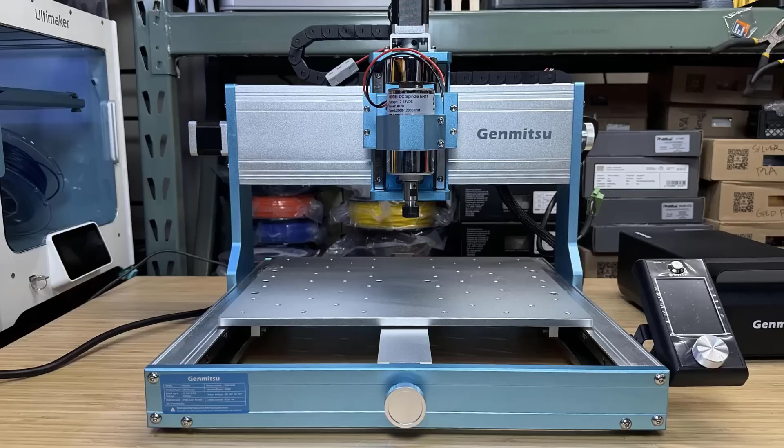As its name suggests, the working area is 300 by 300 millimeters, and the Z travel is 78 millimeters. The motion system uses double linear rails and ball screws on the X, Y, and Z axis.

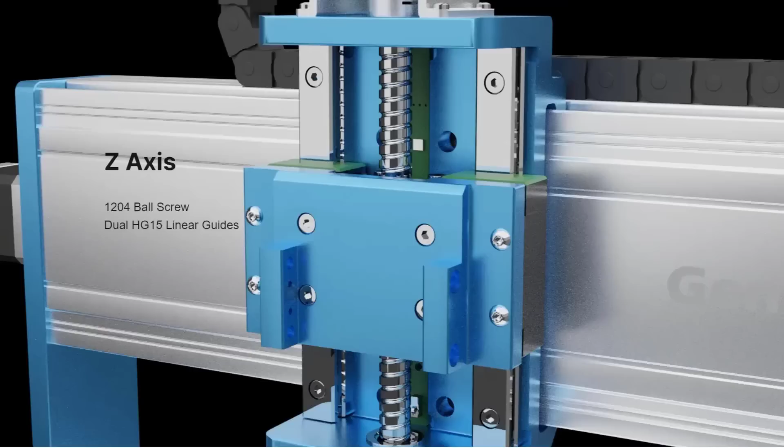The bed is made of one-piece solid aluminum instead of being formed by a few aluminum extrusions or MDF hybrid beds put together by screws. It also has dual limit switches installed at both ends on all axes.

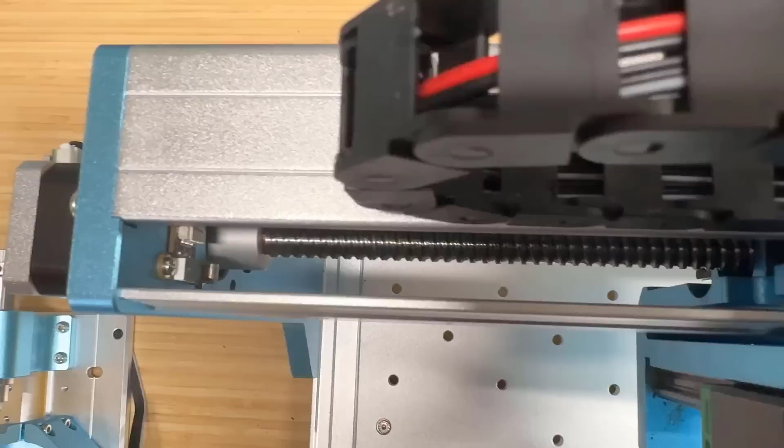The machine weighs over 50 pounds, and for a machine of this size, that's pretty heavy. The stepper motors are 48mm higher torque NEMA 17, and the controller box has its own metal housing and is right next to the machine.

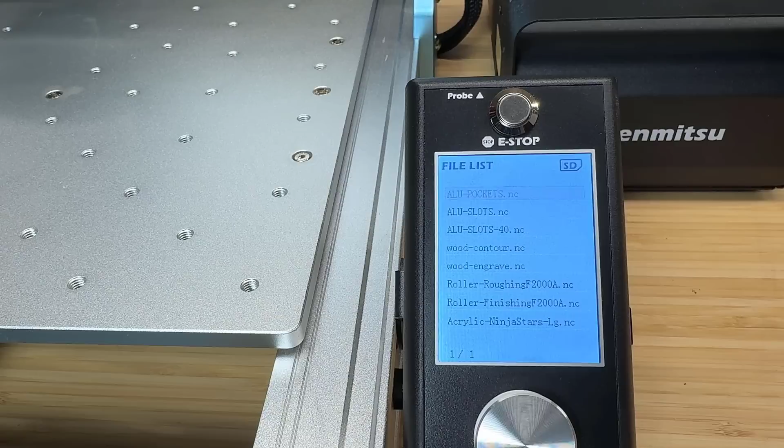It comes with a 3-inch color screen, which also works as an offline controller, meaning you don't need to connect a USB cable to your computer and run another G-code sender software to control the machine via the virtual serial port. There's an emergency stop on the screen, and it also has a tool height setting Z probe that connects to the screen.

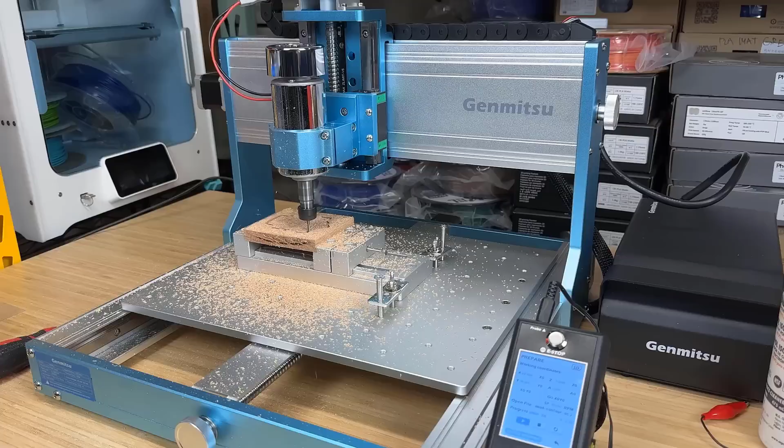The spindle is a 300-watt air-cooled spindle with a maximum RPM of 12,000. It also comes with a 65mm router mount for you to use your own wood router like the Makita router. I will also use that to cut aluminum and compare the result with the stock 300-watt spindle.

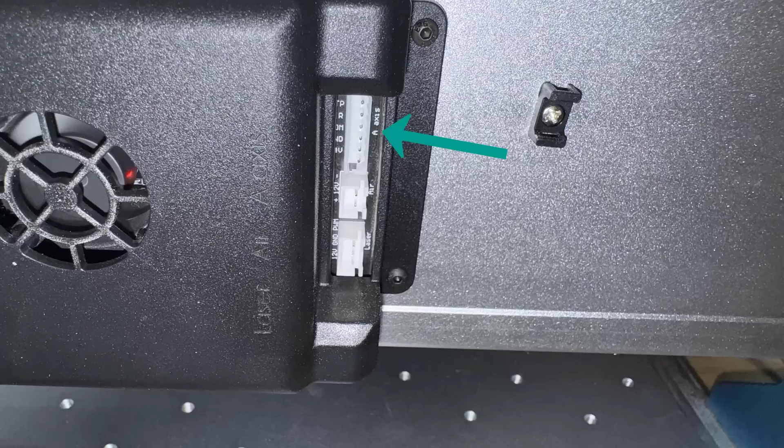There are extension ports for you to connect to a 4-axis, which I will also test out. It also has a port for you to connect an MPG hand wheel, and it is compatible with the laser engraving module.

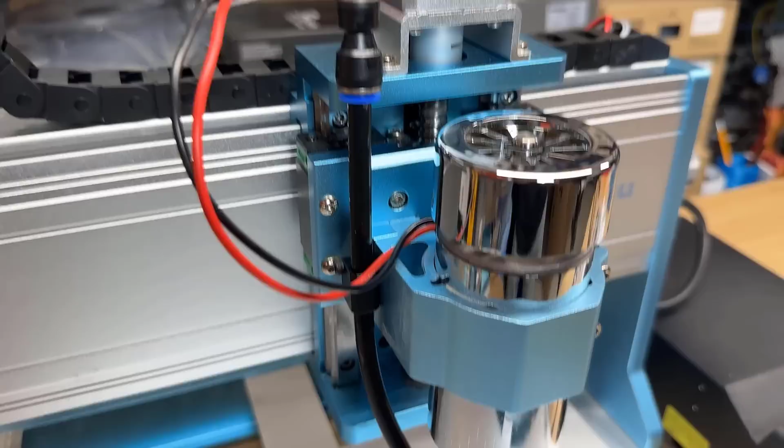For other accessories, it includes an air tube, which you connect to your air compressor or mist cooling system, and there's also some basic clamping tools and engraving bits.

The machine is mostly assembled, so you can expect to spend less than 50 minutes on assembly, and it should work right out of the box.

This 52-pound machine is close to 60 pounds with packaging. It's well protected by a few layers of thick laser-cut foam. The gantry is on the top layer, and the one-piece base is at the bottom.

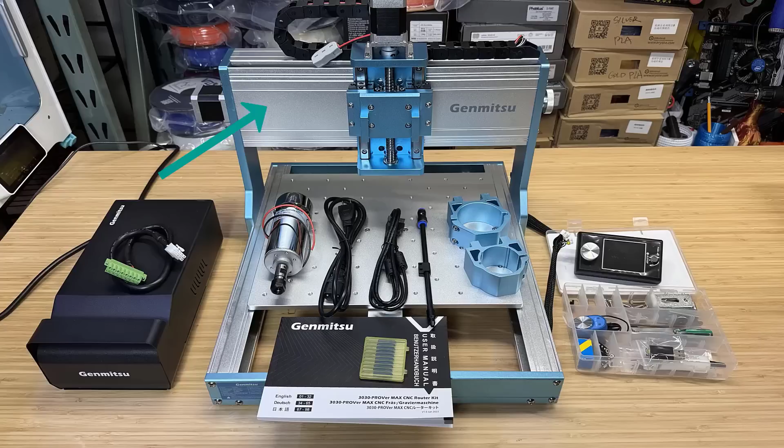We have the gantry, the base, the controller box, a 300-watt spindle, some cables, the air tube for connecting a compressor, and 2 mounts, one for the stock 52mm spindle and one for 65mm wood routers.

There's also the user manual, a box of 10 engraving bits, a color screen, and a box with all the tools and screws you need to put this machine together.

We will start by securing the gantry to the base with screws. Connect the color screen at the front right, connect the cable from the base to the back, put on the spindle mount, then the spindle, and connect the spindle power.

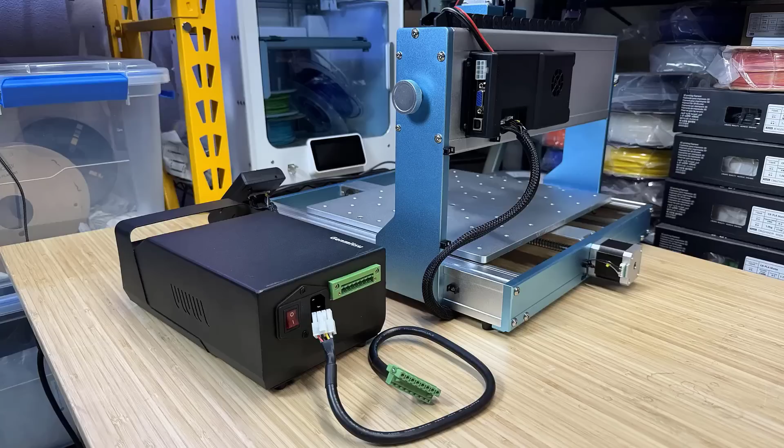Finally, connect the controller box to the cable hub at the back of the machine and the power cord. Now the machine is ready to use.

The color screen is not a touchscreen, and it's controlled by the knob. I will use it to jog the machine and test the spindle.

Home the machine, and all the axes, the spindle, and the limit switches are working.

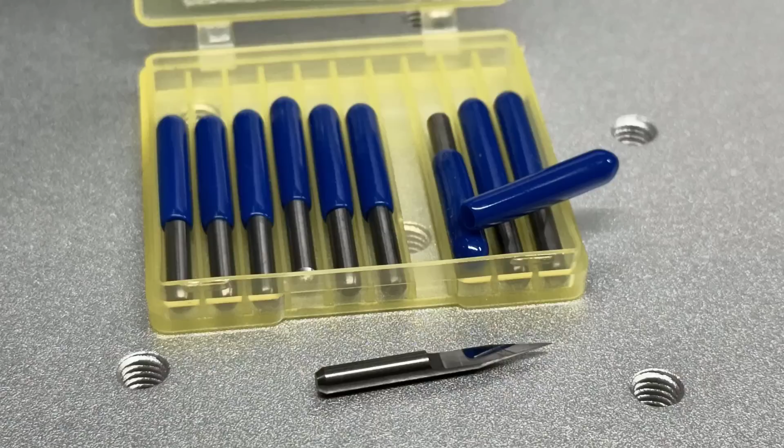Let's start with some soft materials. I will use the engraving bits that came with the machine to engrave a Gryffindor logo on a piece of 1/2-inch thick red oak wood.

I will do a 1mm step down and 2 passes. Then, I will switch to an 1/8-inch 2-flute flat end mill to run a contour with a 1mm step down and 14 passes to cut it out completely.

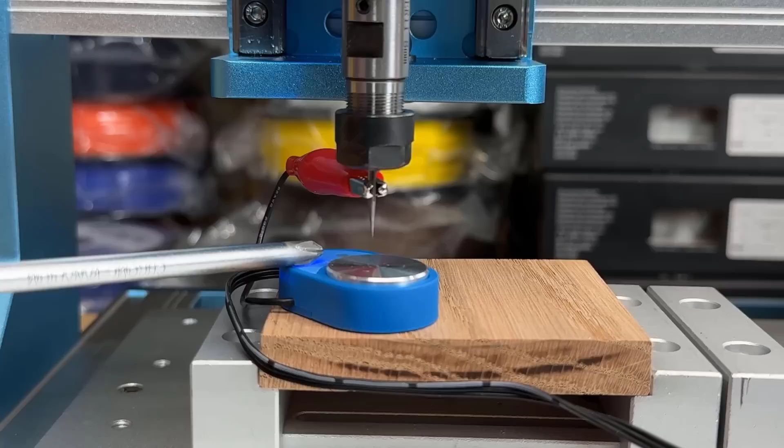I will use the Z probe to set the tool height. For a flat end mill, you can just let it do its job, but for an engraving bit as it's sharp, it will poke the probe's surface and lift it up. So, it will be better to apply some force to make sure the probe stays in its place.

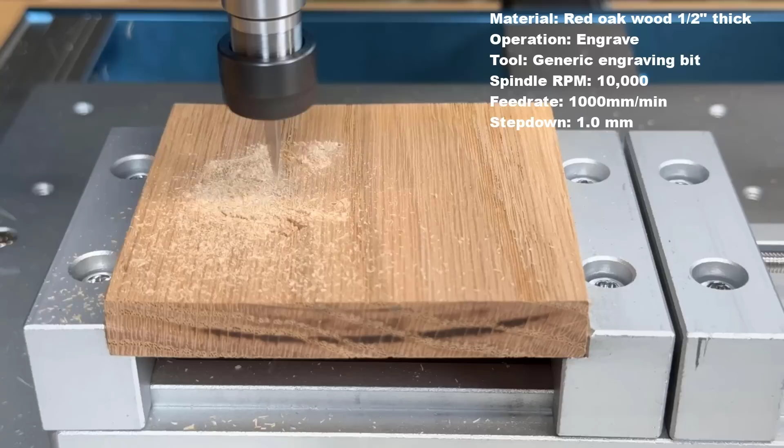After the engraving is done, I will change to the flat end mill and set the tool height again.

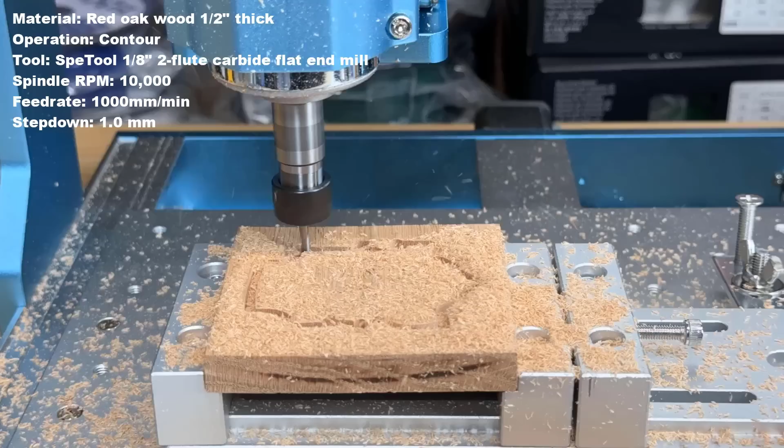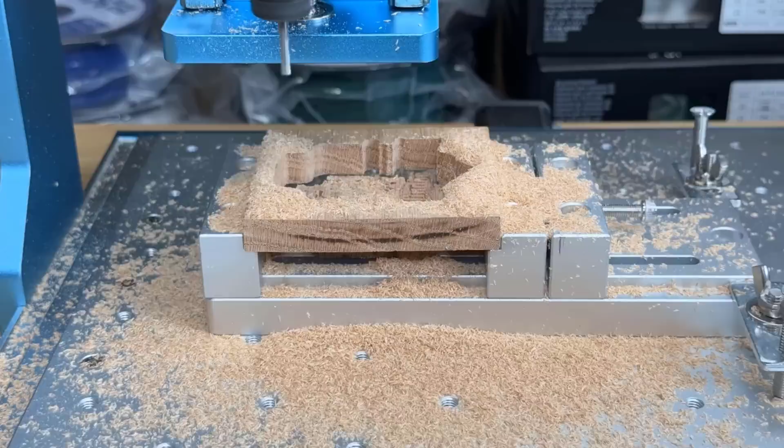I didn't use the clamping tool that came with the machine and used my own mini vise instead. As you can see, it will just drop right off after it is completely cut through. The engraving result is very nice.

The 300-watt spindle isn't very powerful, but it's good enough for this red oak wood. The cut is also fairly clean. It will look even better with some light sanding.

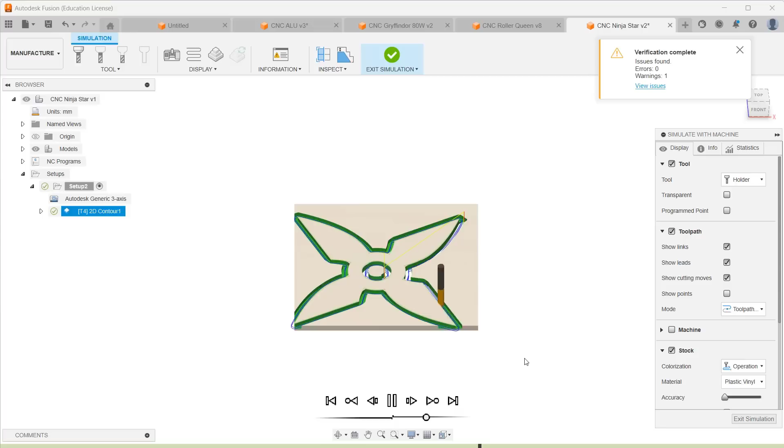Next, I will cut a ninja star from a 3mm black acrylic. I will just run a simple contour and cut 4 passes. This time, I put a spoil board underneath to protect the aluminum bed.

As the acrylic is quite large, I didn't cut it down to a smaller size and just tried to mount 3 corners to secure it. I didn't mount it too well, as you can see it flexes a little with the cutter plunged down, but I will just let it finish, as this shouldn't have too much of an impact on a soft material like acrylic.

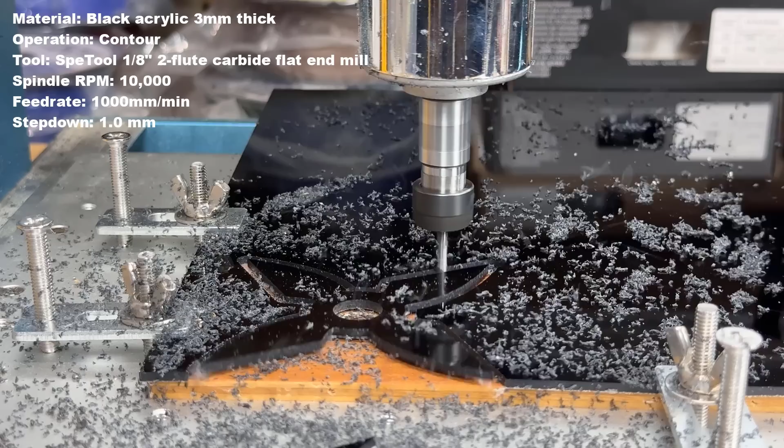It cut through completely after 3 passes, so I stopped the machine manually. Even though the acrylic is not mounted perfectly flat, the cut still looks clean. On one edge where the stock was vibrating, the cut isn't that clean, but the rest looks alright.

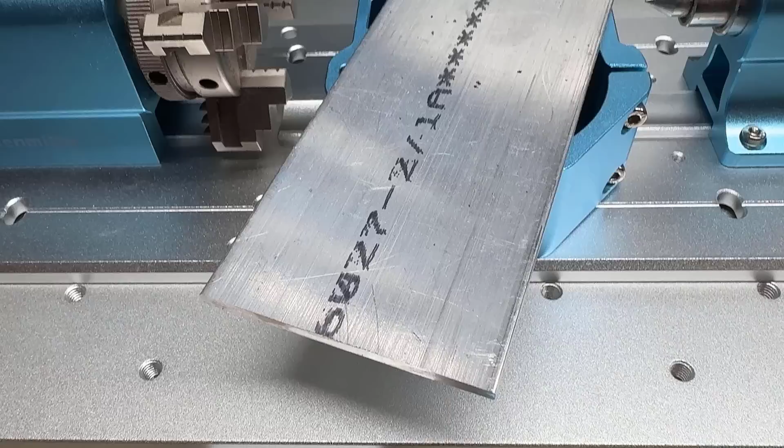Then, I will try some aluminum. First, I will start with a 300-watt stock spindle. I will make 10 slots on this 1/8 inch 6061 aluminum plate, using a 200mm feed rate and a 0.1mm step down all the way to a 1mm step down.

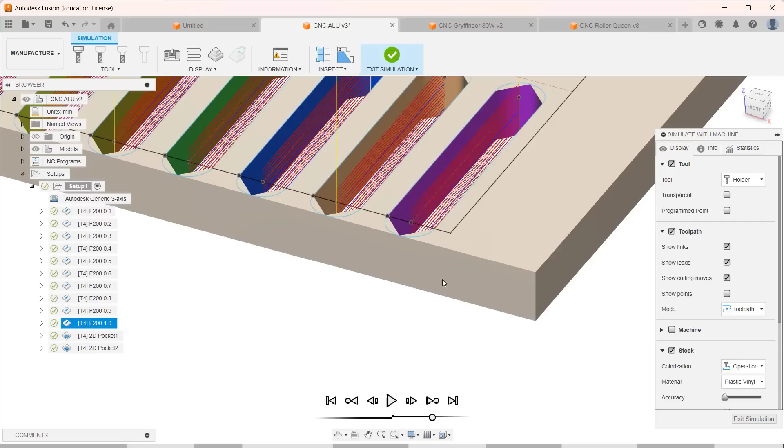As you can see, this slot operation in Fusion 360 will generate a progressive step down. For example, the last slot step down was set to 1mm, but it won't plunge all the way down 1mm, it'll move back and forth to reach that depth progressively. This would make it easier for smaller machines.

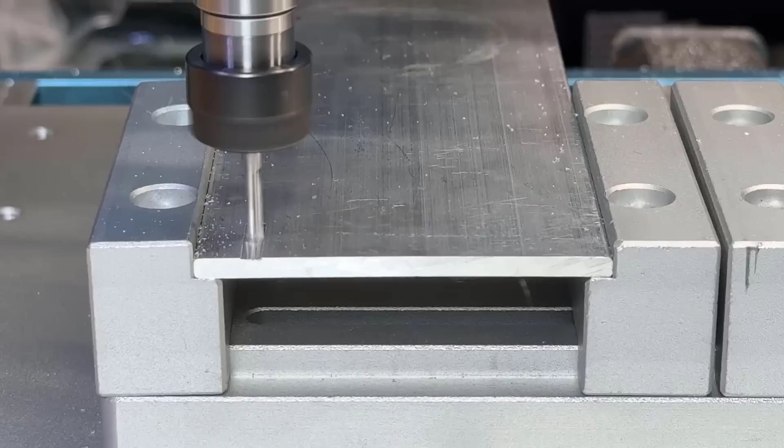I will switch back to my mini vise and set the tool height again. The sound is a bit high, and you can hear some vibrations, as this kind of air-cooling 300-watt spindle is not that powerful, but let's see how it works.

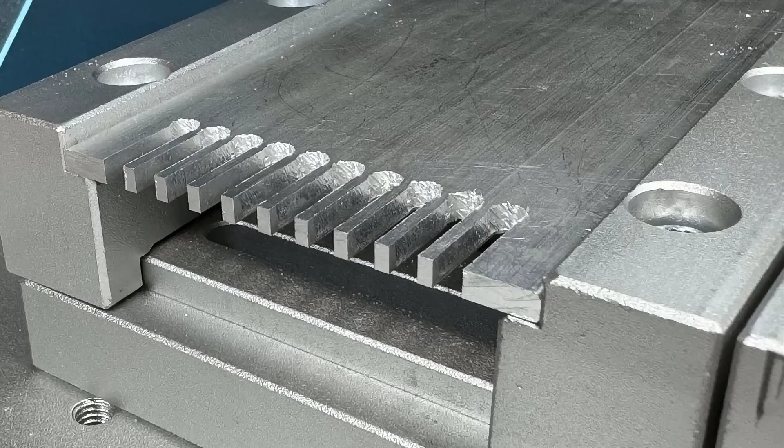Let's take a look at the result. The first one at a 0.1mm step down looks cleaner than the last one, but all of them are not very clean. It can still cut aluminum with a fairly acceptable result.

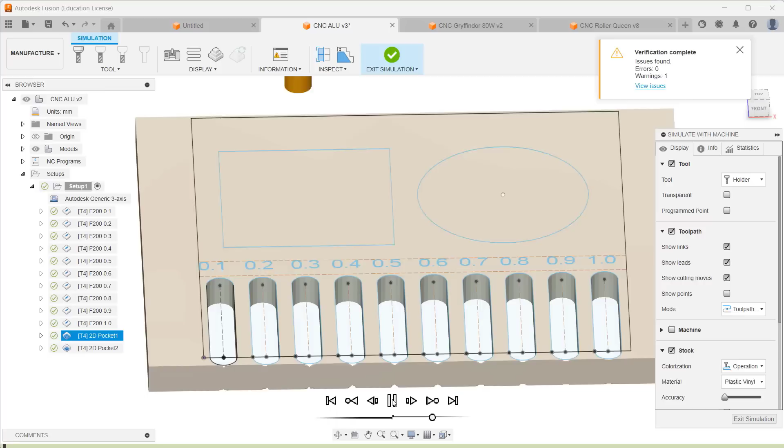Then I will make 2 pockets. The size is 20mm, the depth is 2.5mm with a 0.3175mm step down. For pocket operation, it will plunge all the way down to 0.3175mm. The circle would be the same 2.5mm and 0.3175mm step down as well.

As you can see, the chip size of the 0.3175mm step down is larger than those made with the slot operation.

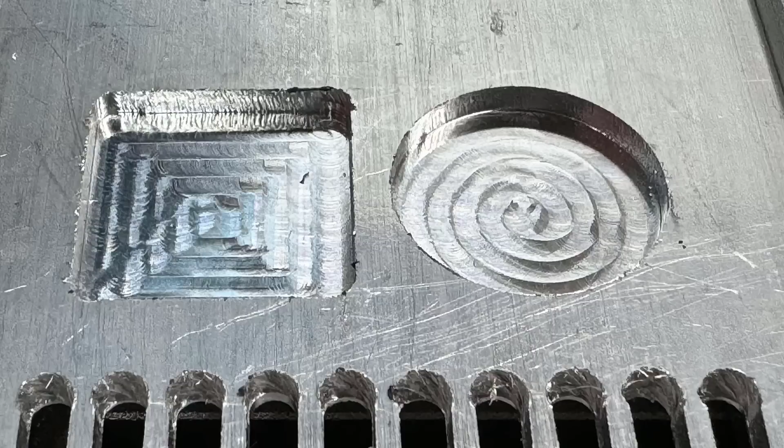Okay, the result is not too bad. The edges look slightly cleaner than the slots, and the circle is a little better. Let's check the accuracy. As the edges are not smooth, we can expect the square to be larger than the original size. It's 20.17mm instead of 20mm.

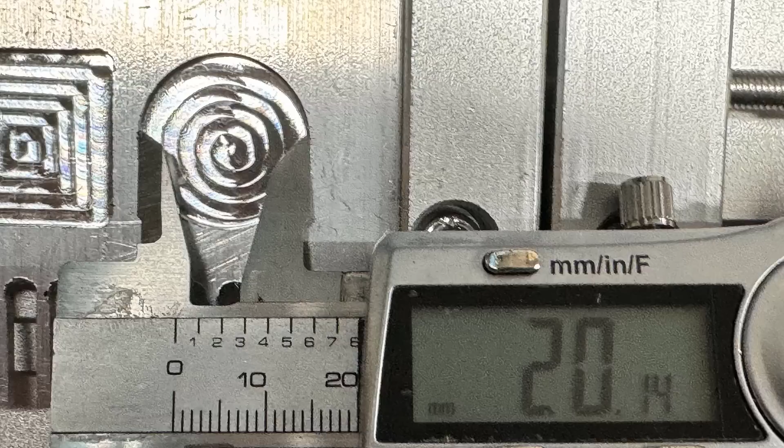The circle is slightly better, but the widest point I can measure is still a bit off at 20.14mm. As the machine is rigid, if we switch to a more powerful Makita router, I expect the result could improve tremendously.

It sounds much better. I can't hear the vibration anymore, the cut looks much cleaner. I will let it run the exact same G-code and see the result.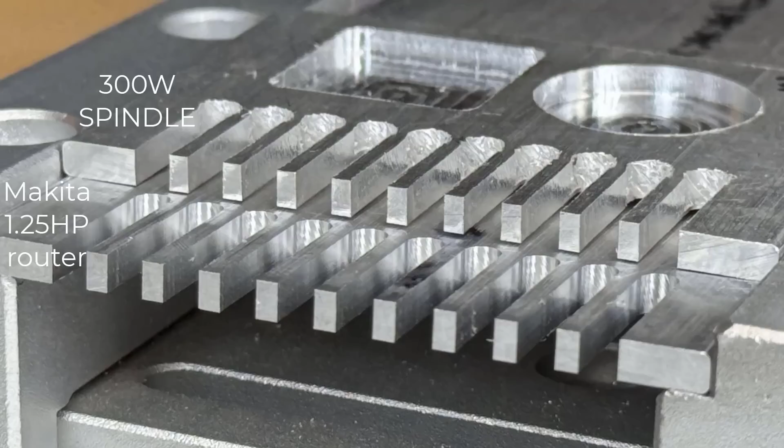I think the result is much better. All of them look smooth, even the last one with the progressive 1mm maximum step down. When compared to the one on top, made by the 300-watt spindle, the difference is obvious.

Let's also make 2 pockets and compare the result.

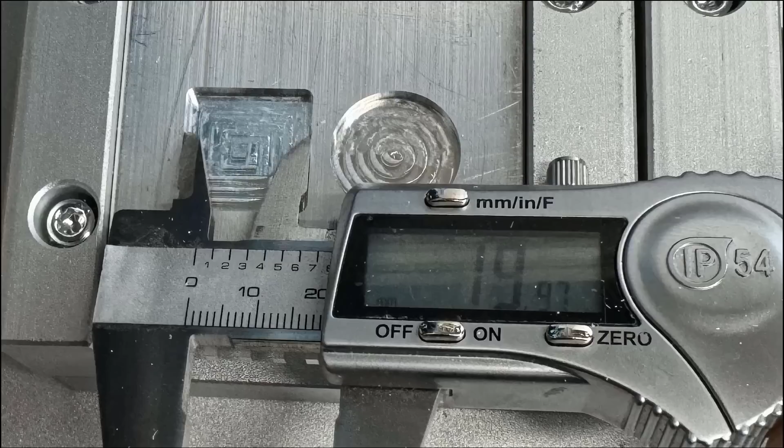This time the square measured to be 19.97 millimeters, which is pretty close to 20 millimeters. And the circle is 19.96, so the accuracy of about 0.04 millimeters is pretty good for a desktop machine.

When putting them together, the 300-watt spindle can mill aluminum with some rough finish. The machine is rigid, and the bottleneck is the stock 300-watt spindle. When using the Makita router, it not only gets almost mirror finish, but also has high accuracy.

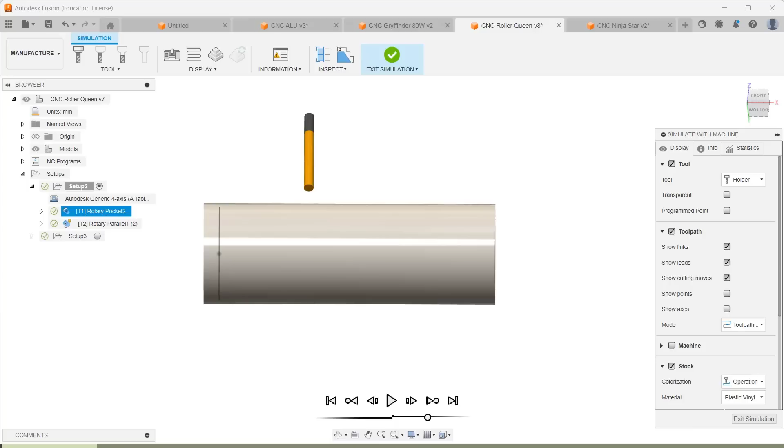As this machine also has an optional 4-axis roller, I will try it out. I will make a queen chess piece with a red oak cylinder. The first operation will be roughing. I will use the same 2-flute 1/8-inch flat end mill with a 2mm step over and a 1mm step down, leaving 0.5mm stock. Then I will use a 1mm ball end mill for finishing using a 0.2mm step over.

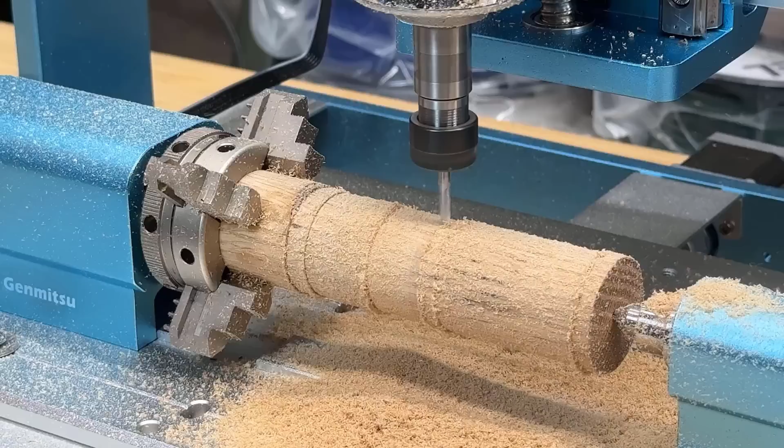On my first try, I found that the 4th axis is moving super slow, so I modified the firmware parameters to double the speed and acceleration limit to 1000 mm per minute and 15 mm per second squared, and tried again.

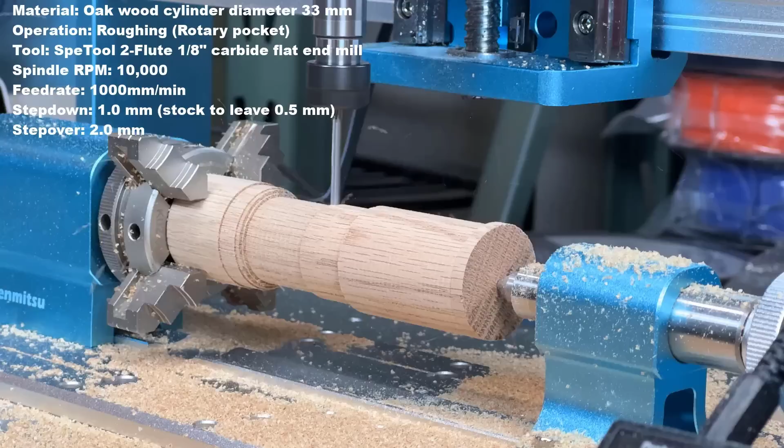As you can see, the machine y-axis is moving along with the 4-axis roller. So this is a real 4-axis machine instead of using the roller to replace the y-axis like a laser engraver.

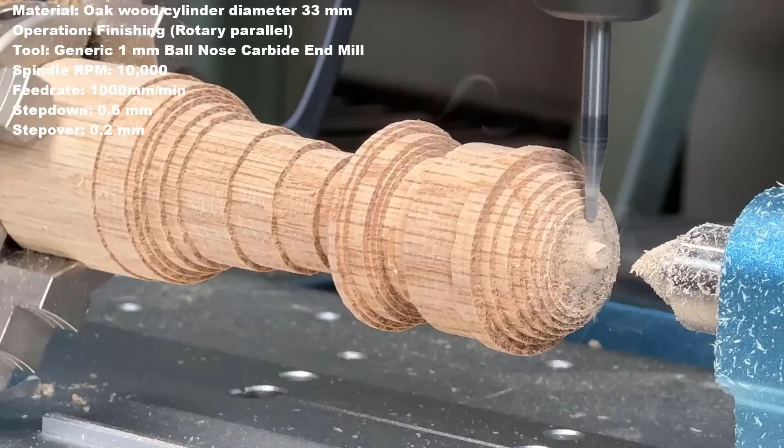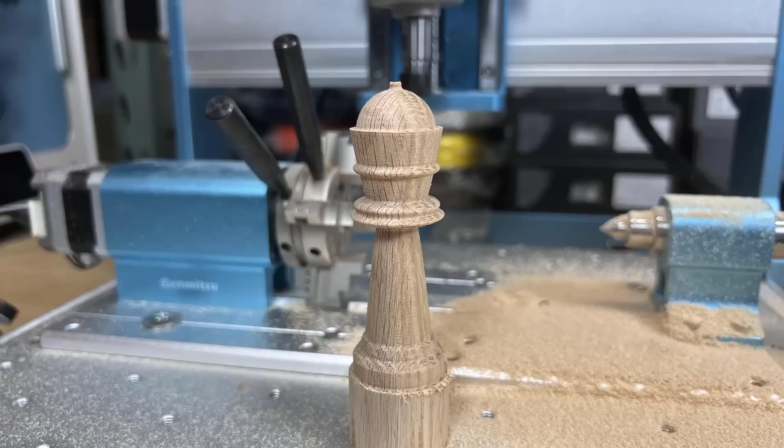The roughing operation finishes in 1 hour and 10 minutes. Then we start the finishing operation with the 1mm ball end mill. It took another hour to finish. Making a chess piece like this requires a little over 2 hours, but the result looks good. After cutting off the bottom with a miter saw, this queen looks pretty awesome.

Okay, let's talk about the pros and cons of this machine, starting with the pros. 1. This machine requires minimal assembly. It's even easier than putting a 3D printer together. You can start using it in 15 minutes, and it works pretty well right out of the box.

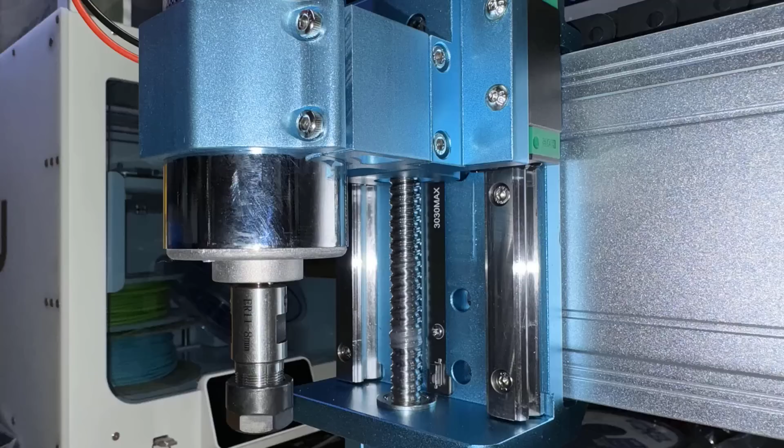2. The whole machine is rigid. It's smaller than other GENMITSU machines I've tested, but it's equipped with all linear rails and ball screws on all axes, so it's just as rigid as those larger machines, and I can cut metal as aggressively and quickly as I did on the 6050.

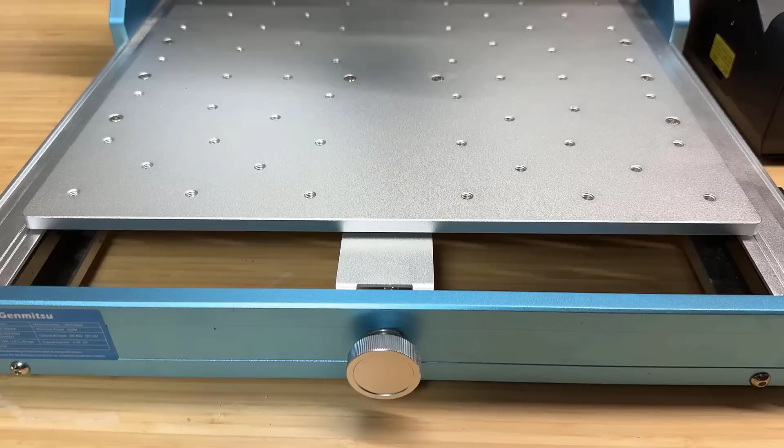3. The solid aluminum bed is high quality. As it's one piece, it's more stable than those formed by a few aluminum extrusions or a hybrid joined together using screws. 4. The offline controller is handy.

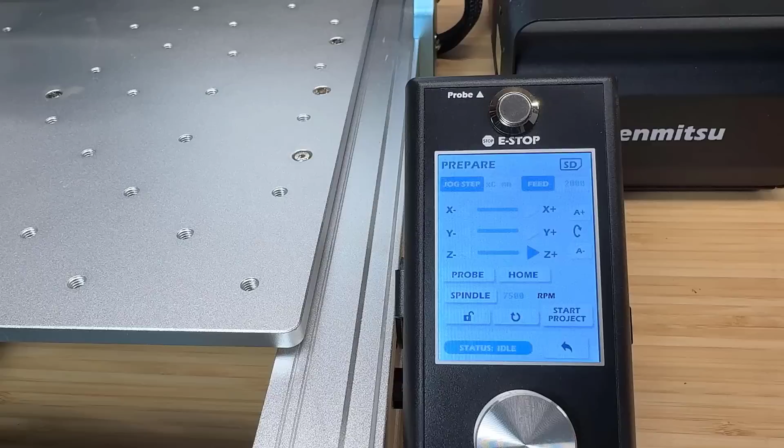Even though it's not a touchscreen, I still use it to do all the jobs in this video. Personally, I don't like using Candle or the universal G-code sender, as when you use the USB cable to connect to the PC and use the virtual serial port, it may occasionally show errors, especially if you run a job that takes over an hour. However, with this offline controller, I didn't see a single error during the whole testing process, but I will talk more about the screen later.

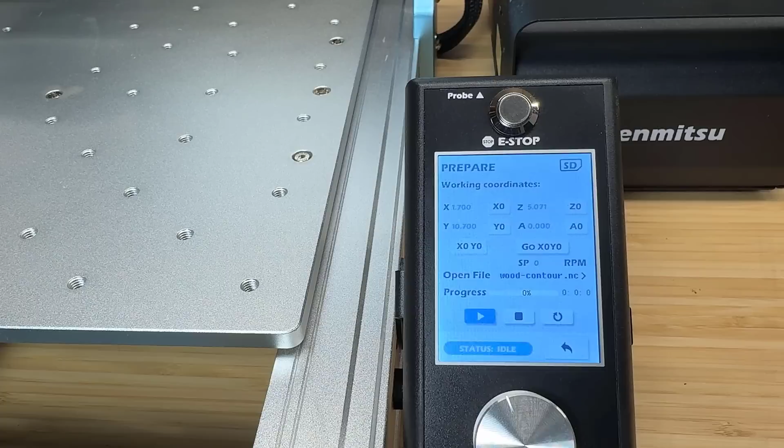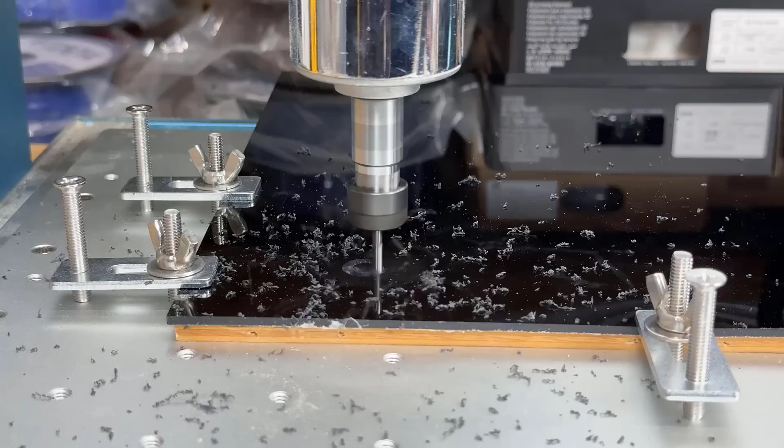5. It also included the mount for 65mm wood routers. The stock setup came with a 300-watt basic spindle, and it works fine with soft materials like wood and acrylic. It can also cut aluminum at a slower speed with acceptable results. But of course, if you need to cut metal faster and with better accuracy, spending another $140 for a Makita router would be the better option.

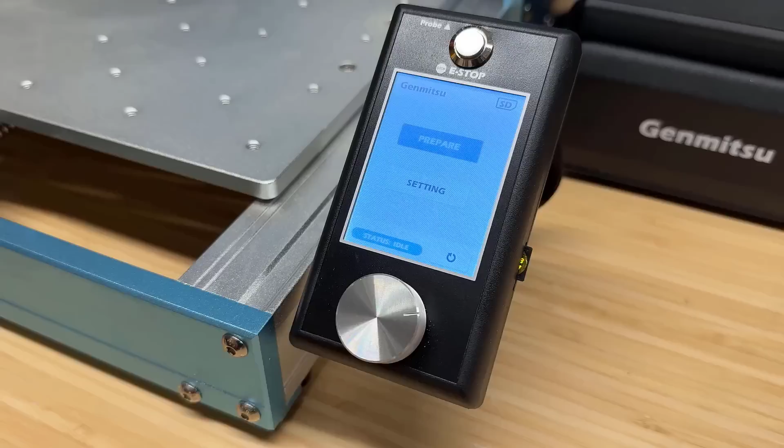Now for the cons. 1. The color screen just uses a knob instead of being a touch screen. When jogging the machine in all 3 axes, it would be better to use the touchscreen interface with arrows. It also doesn't let you adjust the speed after the job starts.

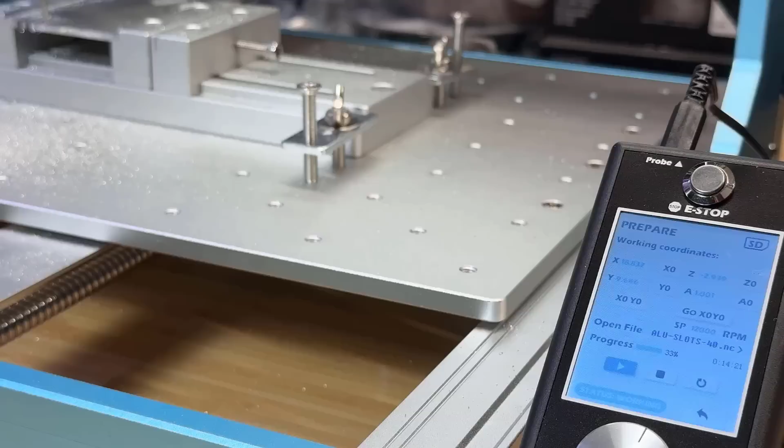For example, with the queen chess piece, the G-code was supposed to finish in around 1.5 hours, but I set the speed too slow and it actually took almost 3 hours. If it allowed speed changes on the screen, I could have just sped it up to 150% or even 200%, as long as I could see that the machine can handle it.

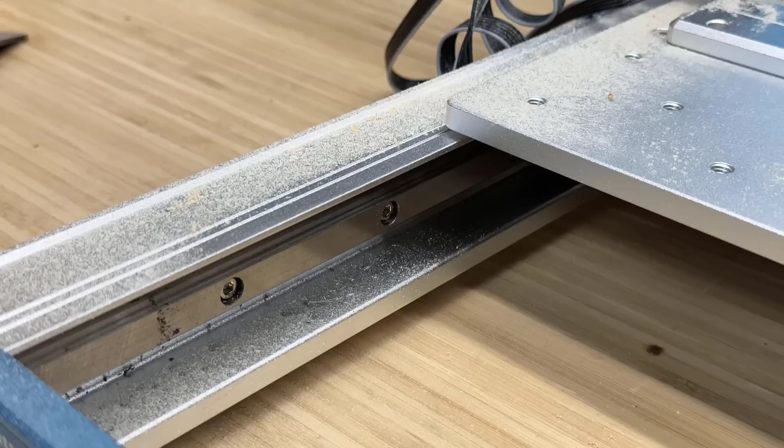2. The X-axis is well protected, but the Y-axis isn't, and the Z-axis is entirely unprotected. I understand that the Z-axis of a small machine is limited, and it may decrease the usable Z height if you add bellows, but at least for the Y-axis, I would like to see better protection.

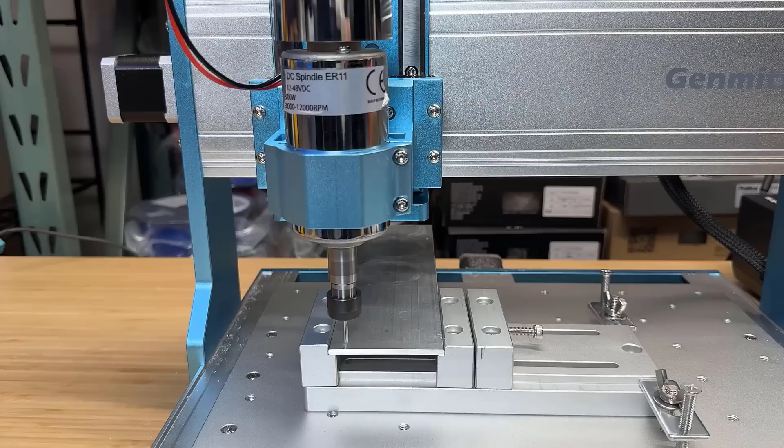3. The clamping tools are the most basic ones you find on an entry-level 3018 CNC. For the price of this machine, it deserves something better. As a result, you can see I just use my own mini vise, and I'm just not a big fan of those cheap clamps.

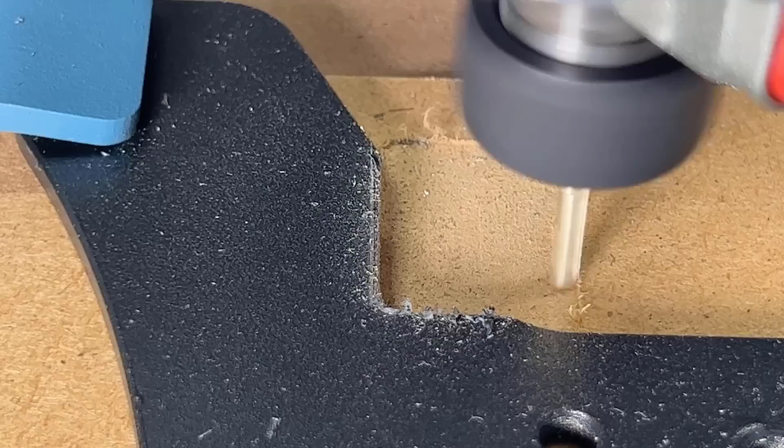4. The aluminum bed is nice. It would be better if it came with some thin MDF spoil boards with matching screw holes, as you may make mistakes and cut the bed sooner or later. If so, I believe it wouldn't be cheap to have it replaced.

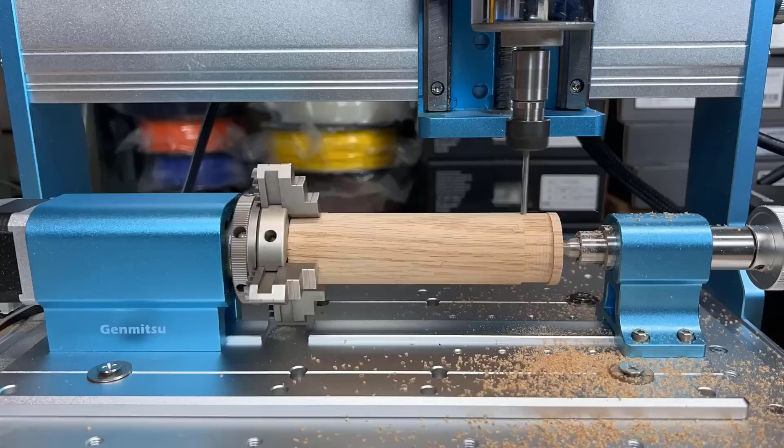5. The maximum 78mm Z travel is alright if you're not planning to use the 4th axis. However, as the center point of the 4th axis is 50mm, it's only 28mm away from triggering the top limit switch. When including the 5 to 10mm retraction height, you can see there's not much room left when I was making the queen with a 25mm flute length tool to avoid collision.

In conclusion, the build quality of this GENMITSU 3030 Pro is high. The machine has all linear rails and ball screws, so it's just as rigid as larger machines like the 6050 and 4030 V2, except with a smaller footprint and lower price.

The assembly is easy, so it's also beginner-friendly. If you don't need a very large working area, this can be a capable desktop CNC that lets you work with wood, acrylic, other soft materials, and even metals.

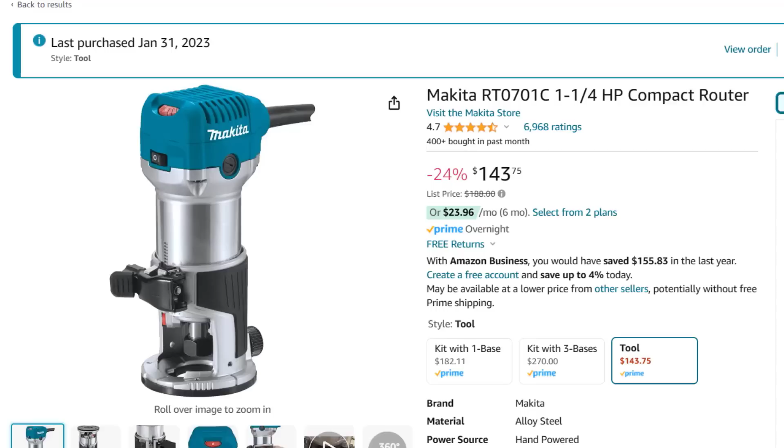The machine is around $850, and even with the Makita router, it'll still be under $1,000, but that's not including the $249 4-axis and the mini vise you saw in this video.